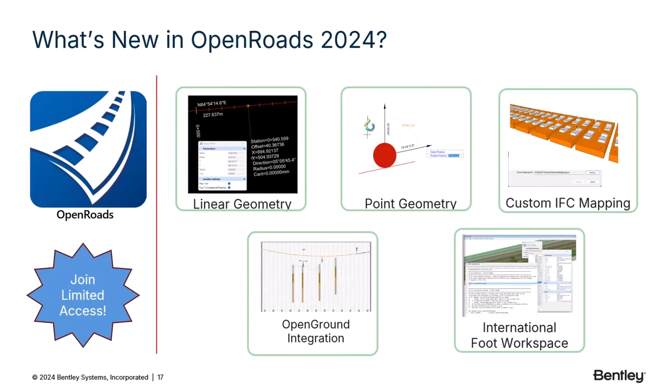Why OpenRoads 2024? We always listen to you and prioritize your needs. That's our goal, and that's what we did in this release as well.

I remember very clearly in last year's Civil User Conference keynote, we said 2024 will be a year that quality and stability will be our number one priority. And that's what we did. We put a huge focus on quality and stability. We addressed more than 1,000 defects, 250 of them are stability issues that we resolved. And then we resolved more than 170 service cases that were reported by you in the last year or two. So we believe that OpenROADS 2024 is going to have utmost quality and stability, but it's not enough.

We will continue down the same path moving into 2025, which we will get into soon.

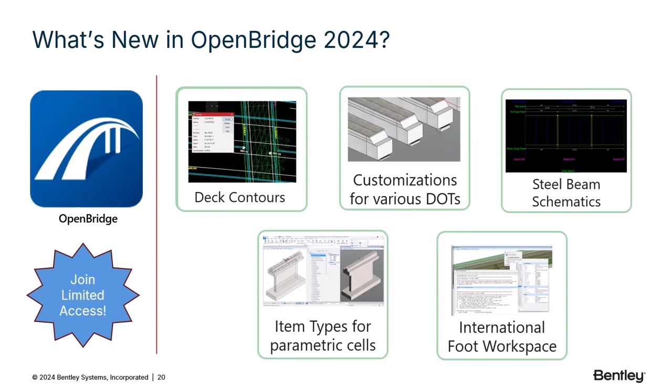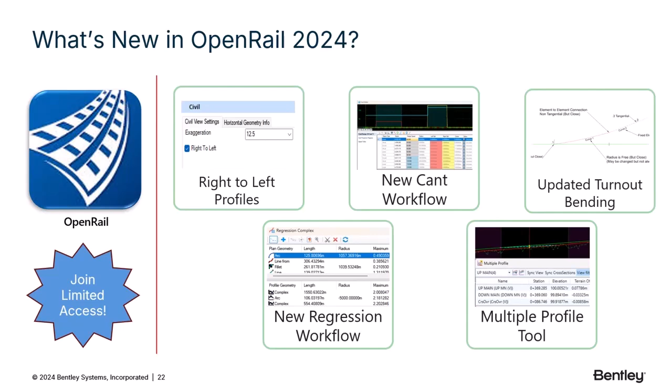So what's next for Bentley Civil? As we said before, we always listen to you and your needs. What will be done from our side has to meet your demands and requirements. Our conclusion is that product stability, quality, and performance is still your number one concern, and we will continue working on those and make it better in 2025 as well.

Obviously, it's not the only thing. We have to ensure the productivity for DOTs, rail agencies, and engineering consultants. Your feedback drives our development in areas like ease of use for the entire product, or ease of use specifically for the geometry functionality, improvements on drawing production, civil digital delivery work that I'm going to touch on later, and improved reporting tools.

I'm also honored to tell you that we are cooking something really, really nice, which I'm not allowed to give you a lot of details at this point.

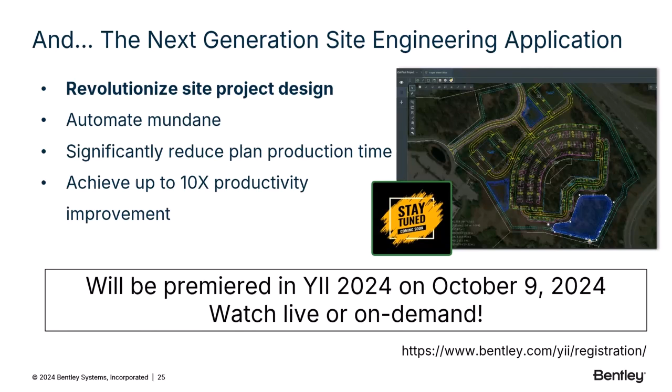So the third and final response to industry challenges: digital project delivery. Almost everyone has a different interpretation of what digital delivery is. Industry challenges for digital project delivery come in many forms, with an evolving workforce, increasing demands from clients, and changing business expectations.

And they typically stem from how we consume and deliver the project. But really, what is it? It is to convey design intent in a way that project stakeholders can understand it. I have to underline the word understand it. We have to convey the design intent for others to understand it.

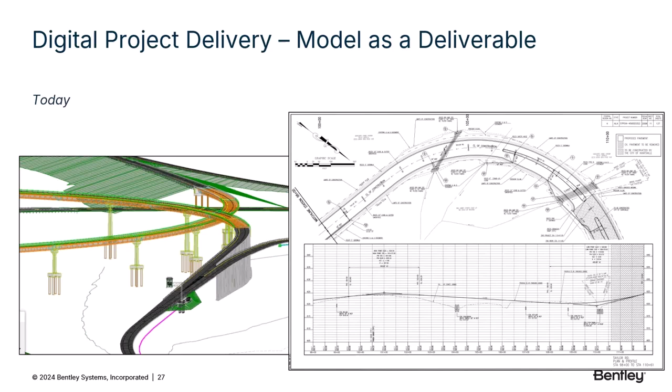And we are driven by that same purpose. We would like to present project information in ways that you are familiar with, that you are comfortable with, and it's understandable to all project stakeholders. So today, the way we do this is through sheets. But what if we reimagine how this could be done?

At Bentley, we understand the challenges that you face when implementing digital project delivery. This has prompted us to reimagine how projects are delivered, not only to meet these demands, but radically improve project delivery for the betterment of the infrastructure engineering sector.

We need to meet people where they are. With these tools, we need to provide a bridge, or a stepping stone, with technology to ease the implementation of digital delivery. That's why we have provided robust analysis tools, easy to access tools for data, and support for formal QA/QC processes.

But we see this as an opportunity to elevate our industry to the next level. And again, we need to meet you in the middle. We understand that going directly to digital project delivery is a steep learning curve. That's why we felt that integrated plan sets are going to help you get there.

Bentley Infrastructure Cloud provides a holistic view of the project. It's not like, okay, I have some plans over here, and I have another model there, I have some data and report somewhere else. No. Bentley Infrastructure Cloud has one integrated digital deliverable that meets the different demands from all project stakeholders.

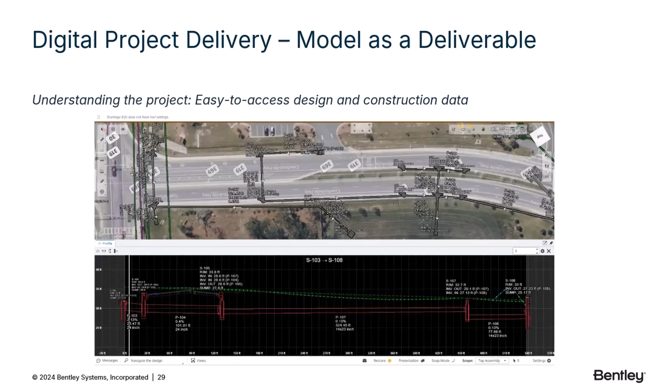Here, Bentley Infrastructure Cloud makes the model accessible, opening up the data via the cloud, addressing both simple and detailed engineering workflows that provide ready self-service for specific use cases.

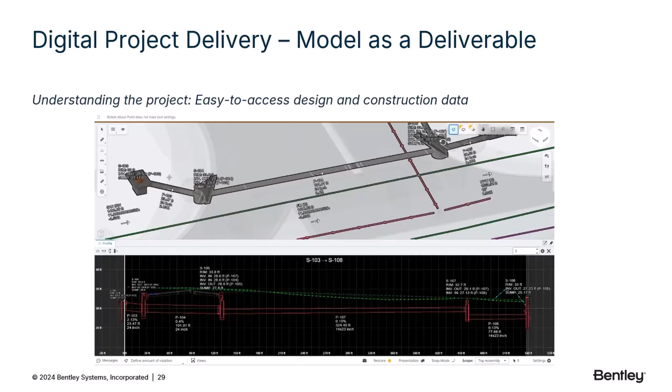Like here with the detailed drainage model, which opens up efficiencies in both delivery and consumption with new workflows that really do not require heavy desktop applications or the typical detailed drawing production practices needed for project consumption.

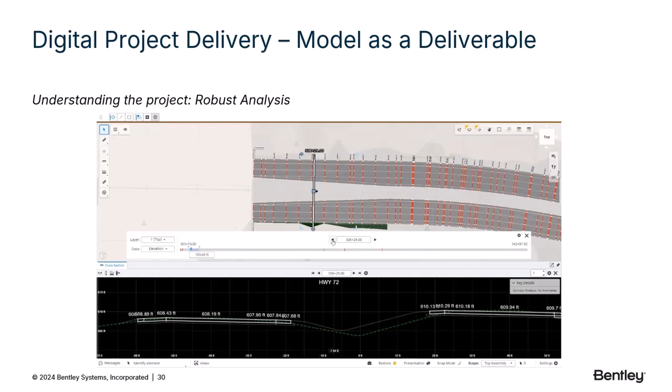Again, here, the model is the source of the project data. There is no doubt about it. Today's workflows produce the sheets, but we still need to understand the model and validate it. This can be done in Bentley Infrastructure Cloud independently from desktop design tools and processes.

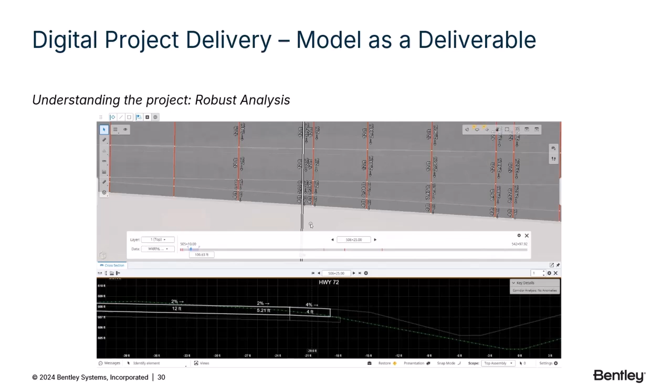Here we have one such example of dynamic model analysis. It helps you review crossfalls, super elevation, and construction depths interactively to identify issues in the model, if there are any.

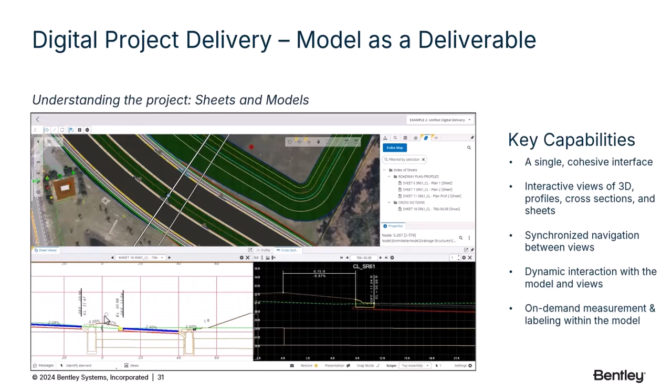If you are interested in knowing more about this, please join Joy Llewellyn at 3 p.m. Eastern today.

I'd like to quickly touch base on DOT adoption status as the last thing. Today, there are 37 state DOTs adopted OpenRoads and 27 DOTs adopted OpenBridge, and this number keeps increasing every day.

I'd like to use this opportunity to thank state DOTs, but not only them, but also all government agencies all over the world and engineering consultants for their partnership. Over the decades, our DNA is built on working closely with you. We certainly would like to remain that way and further improve it.

Our mission remains empowering you, our users, to design, build, and operate better and more resilient infrastructure. Please remember, we are successful only if you are successful. Thank you very much for listening to me.